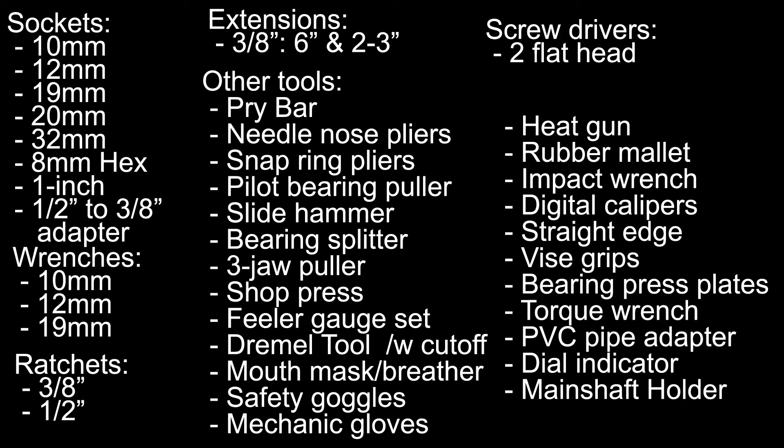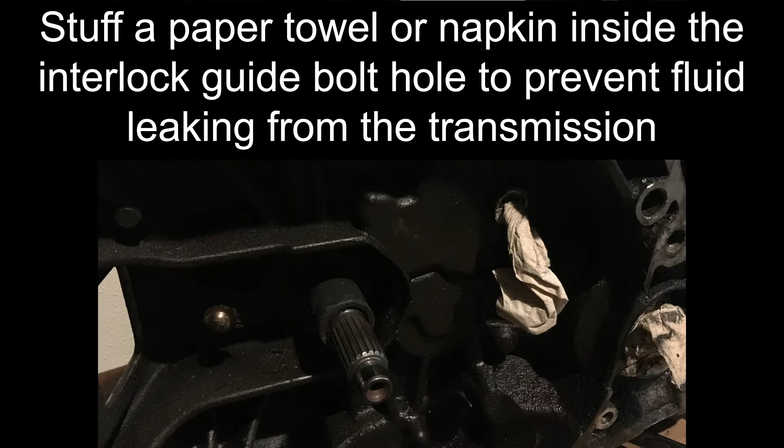To prevent excessive leaking of internal residual transmission fluid, stuff a paper towel, or napkin, into the axle holes. Insert the 8mm hex socket into the interlock guide bolt and unscrew it. Stuff a paper towel inside the interlock guide bolt hole, to prevent residual fluid from leaking out of the transmission. Remove the countershaft snap ring bolt by using the square drive of a 3/8 inch ratchet.

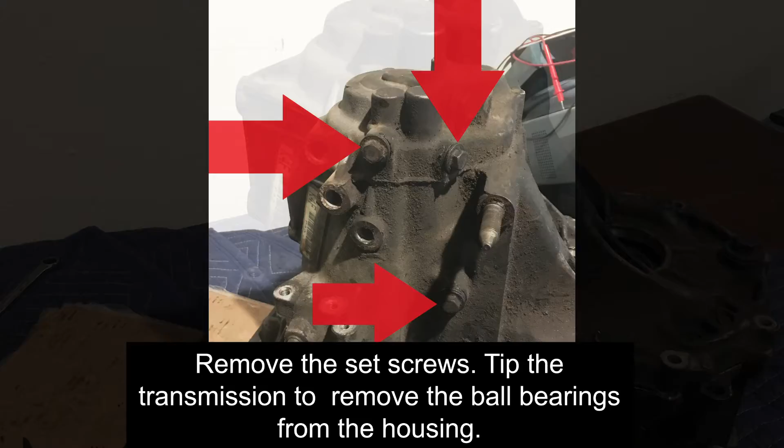Remove the set screws. Each set screw will have a ball bearing and a spring. Tip the transmission to remove the ball bearings inside each pathway. Remove the housing bolts in a cross pattern as shown in the image. Use a pry bar to pry on this point, just enough to crack the seal. Use a pry bar to pry on this point, just enough to crack the seal as well.

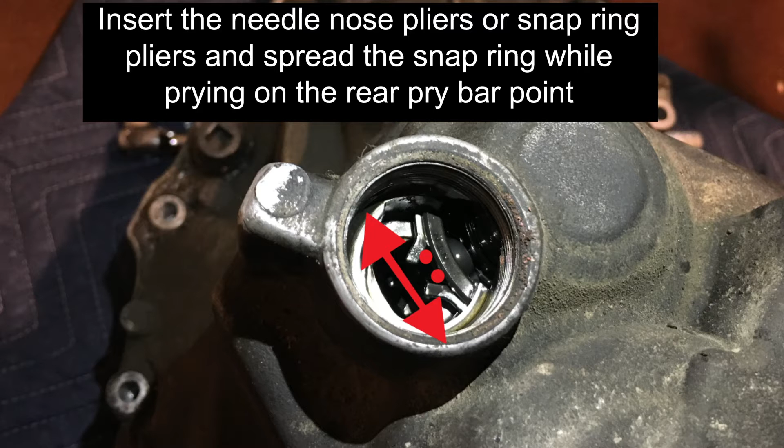Insert 2 smooth-ended flathead screwdrivers between the 2 halves, at these points on the transmission. Stop when you feel resistance. Insert the needle nose or snap ring pliers at the point of the 2 dots, and spread the snap ring while prying on the rear end pry bar point. Prying on the housing while spreading the snap ring will allow the housing to separate from the counter shaft bearing. Once the bearing is released from the snap ring, lift the housing from the transmission.

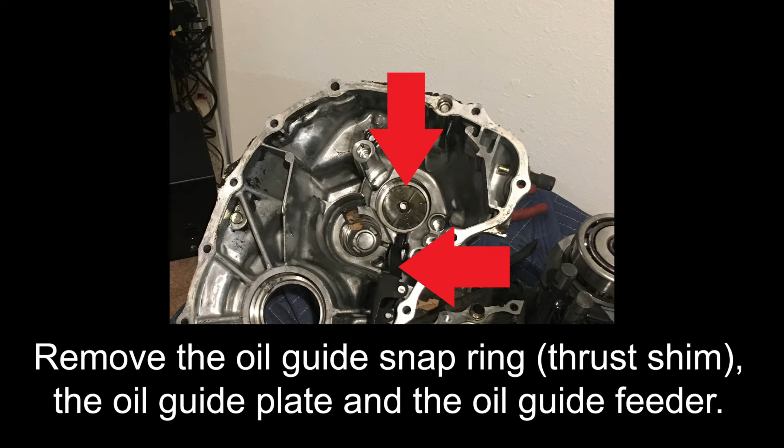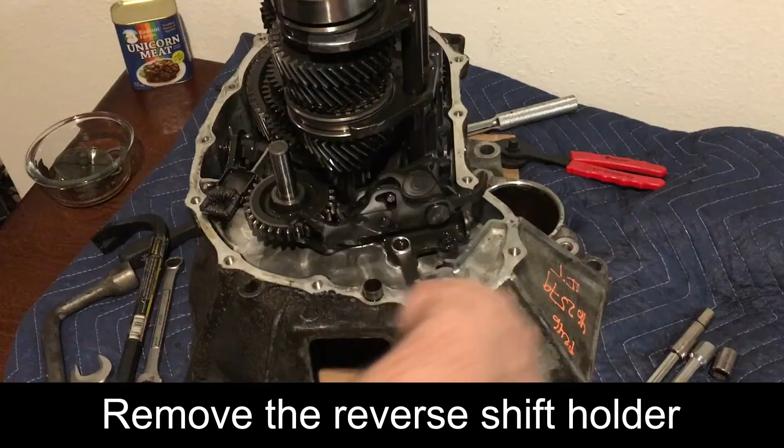If the top main shaft bearing stays inside the case, as shown what happened here, the top of the transmission housing can be heated and tapped with a rubber mallet to release the bearing. Remove the oil guide snap ring, or thrust shim, the oil guide plate and the oil guide feeder. Remove the reverse shift holder by removing the 2 bolts with a 10mm wrench.

Remove the reverse gear and shaft. Note the orientation of the gear and shaft for reinstallation. Remove the shift arm B bolt. You may have to move the shift shaft to orient the bolt to the accessible angle shown here. Remove the spring washer.

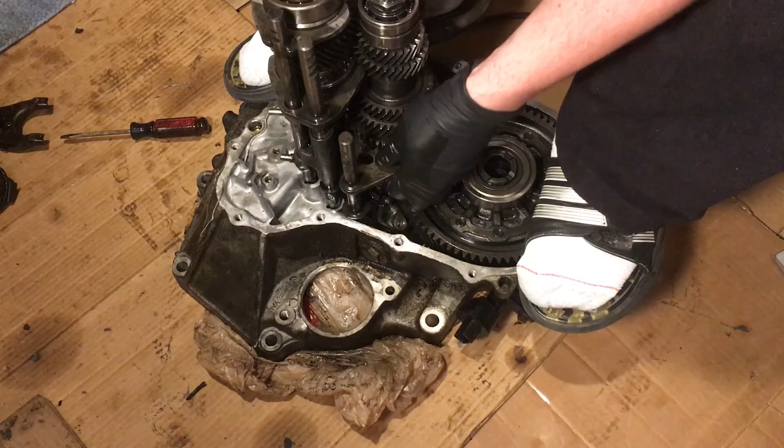Remove the gear and shaft sets. You may have to wiggle the gear sets while pulling to successfully remove them. Work the 2 shafts out. After working them partially out, grab the counter shaft at the bottom and work it up, while turning it slightly, side to side. When the shaft lifts up, the shift forks may fall out, as shown in this video.

If you want to look cool while doing this, wear socks with sandals, as demonstrated here.

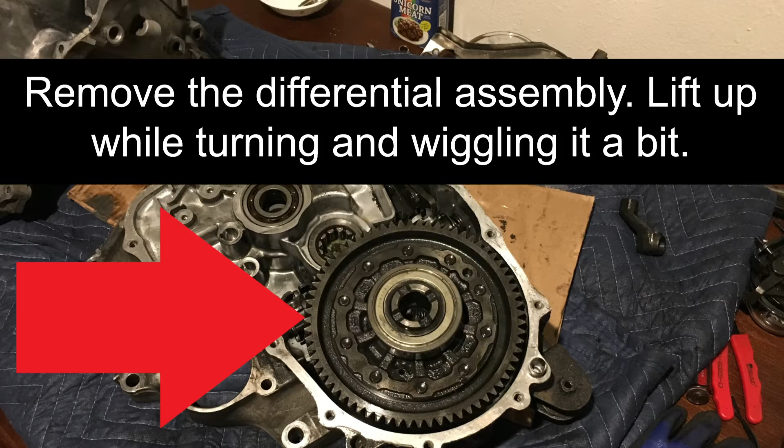Remember, there is a flat washer and a spring washer on the main shaft. The spring washer bulge faces and rides against the input shaft bearing, and the flat washer sits on top of that. Next, remove the differential assembly. While pulling straight up, lightly work it side to side.

Now we will remove the axle oil seal on the bell housing. Take a flat screwdriver along the inner metal ring of the seal and strike it with an impact device. Do the same for the other oil seal. Note the differential thrust shim inside of the bell housing.

Now it is time to remove the shift shaft and attachments. First, remove the set ball spring bolt. Note that this bolt has a spring and a ball bearing that will be retrieved shortly. Next, remove the shift arm bolt and spring washer.

Tip the transmission to retrieve the set spring bolt ball bearing. Slide the shift shaft rod out of its channel. Remove the shift arm from the housing.

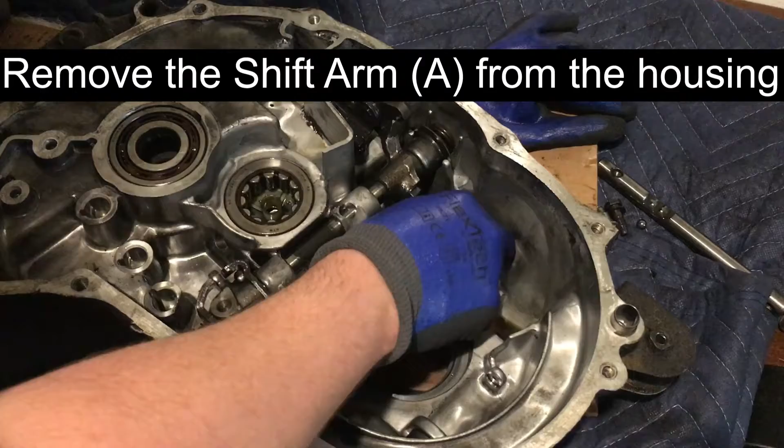Next, we will remove the shift arm bolt and the shift arm shaft plug. For those without an impact gun, a close-ended wrench and a hammer will do the trick. This makes removing the bolt easier because the shift arm will want to move while loosening the bolt. Remember to keep the spring washer with the bolt as it is removed.

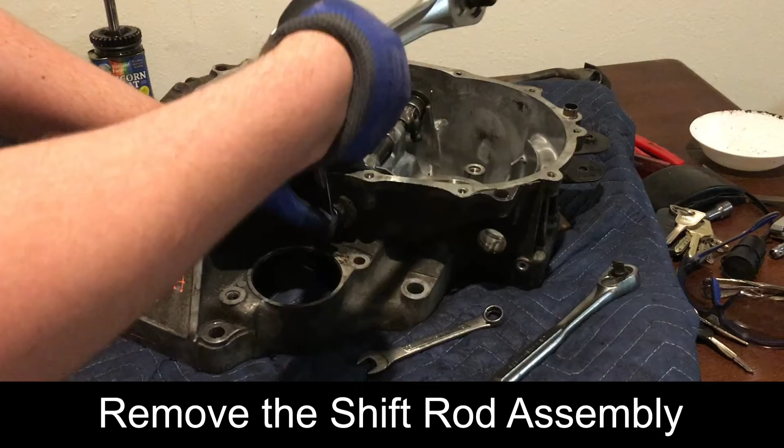Next, we will remove the shift rod assembly. This bolt can be very tight. An impact gun is the easiest way, but the method for removing the last bolt can also be applied here. Once the bolt is removed, the first gear tension spring will come out as well.

Next, we will remove the shift arm rod. Note, there is a ball bearing under spring tension under this shift rod. Cover this area while the rod is being removed. Take note that there is a collar inside of the channel that housed the spring and ball bearing. Do not lose this during cleaning of the housing.

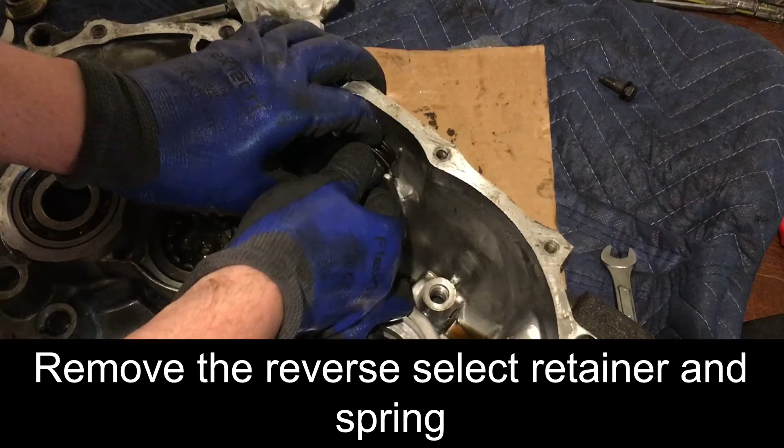Remove the shift arm piece, and then remove the interlock and shift arm piece. Next, we will remove the reverse select retainer and spring from the transmission case. Next, remove the two 10mm bolts from the reverse lock cam, then remove the lock cam assembly.

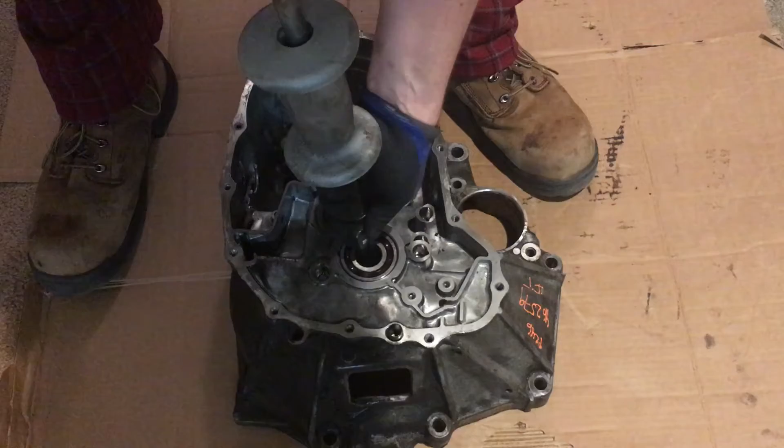Next, we will remove the case bearings. First, remove the input shaft bearing with a pilot bearing remover and a slide hammer. Insert the tool and turn it to expand the removal arms snugly against the bearing. Once the arms are snug against the inside of the bearing, use the slide hammer to pull up. Remember to hold the transmission case down while you do this.

Now we will remove the counter shaft bearing. As with the last bearing, insert the pilot bearing remover, turn it to expand the arm snugly against the bearing, and pull up on the slide hammer. Remember to secure the transmission case as you pull up. Remove the countershaft oil guide plate.

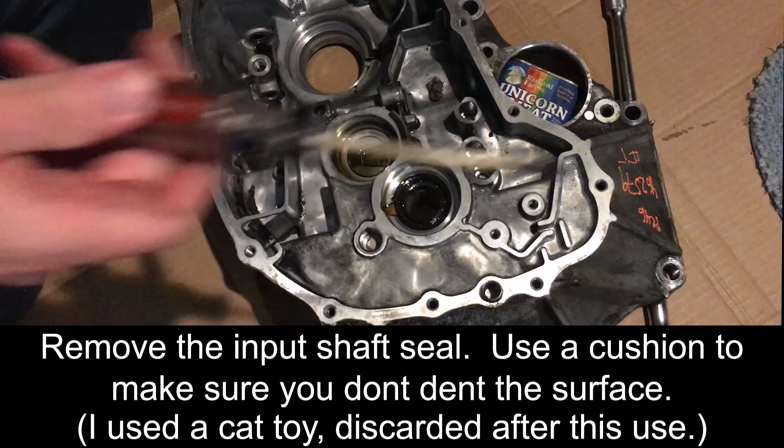Next, we will remove the input shaft seal. Use a cushion to make sure you do not dent the surface with your pry tool. Make sure not to scrape the side of the transmission seal surface with the pry tool.

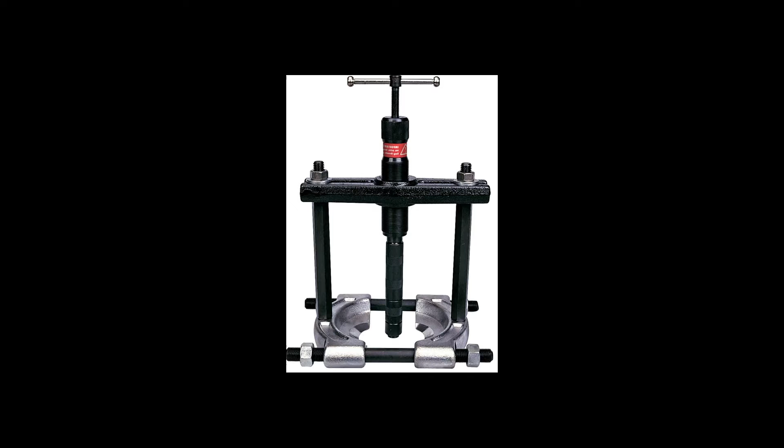Remove the main shaft bearing. The Honda manual calls for a bearing puller, but many times, you can take this bearing off by hand. If you cannot get this off by hand, one of these methods can be used: a bearing splitter with a press, a bearing splitter kit, or a 3-jaw standalone puller.

Next, we will press off the 4th and 5th gear assemblies. Depending on your press setup, you may need to have supports against the 4th gear to press against, as shown here. Make sure to catch the shaft since it will fall as the gears are released.

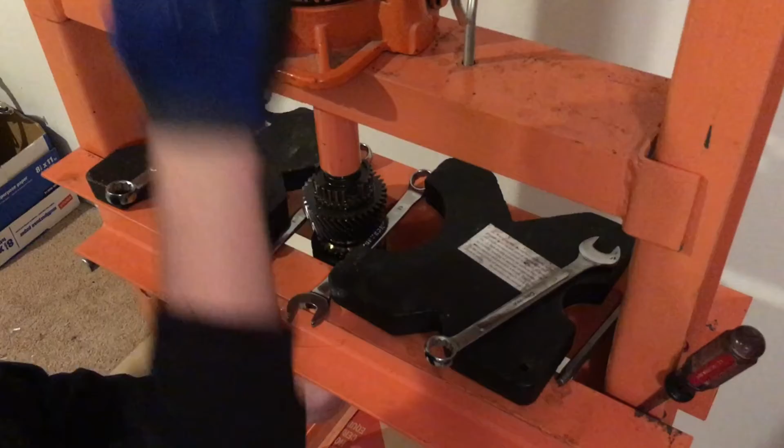Next, press off the 3rd gear assembly. Use the press plates to support the 3rd gear while pressing off the shaft. Again, make sure to catch the shaft as it will fall when the supported gear is released.

An alternative way to take apart the main shaft is to use a rubber mallet and a small socket. First, put the small socket inside the bearing race, against the main shaft, then tap against it. This will release the bearing. Next, hold the 5th gear hub and tap the main shaft to release it. Set the hub aside, then take off the 5th gear synchro and synchro ring.

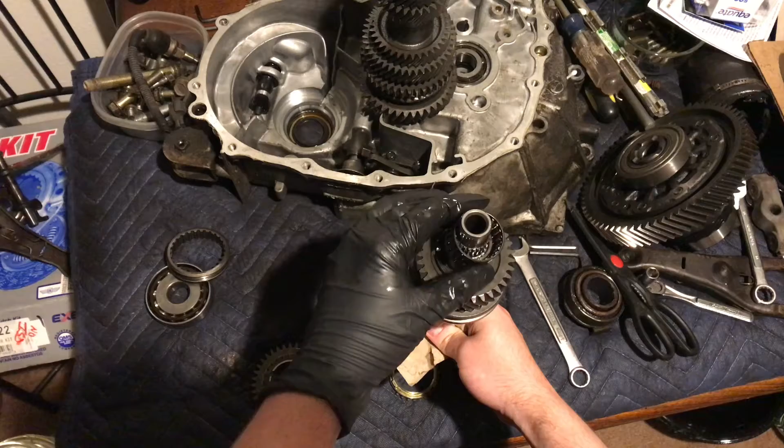Remove the 5th gear and the 5th gear needle bearing, along with the spacer collar that the needle bearings ride against. Remove the 4th gear and the 4th gear needle bearing. Remove the 4th gear synchro and synchro ring. Remove the 3rd and 4th gear synchro slider.

Remove the 3rd and 4th gear synchro hub by holding below the hub and tap the main shaft to release the hub. Remove the 3rd gear needle bearing. This image shows the list of parts that were pressed off of the main shaft.

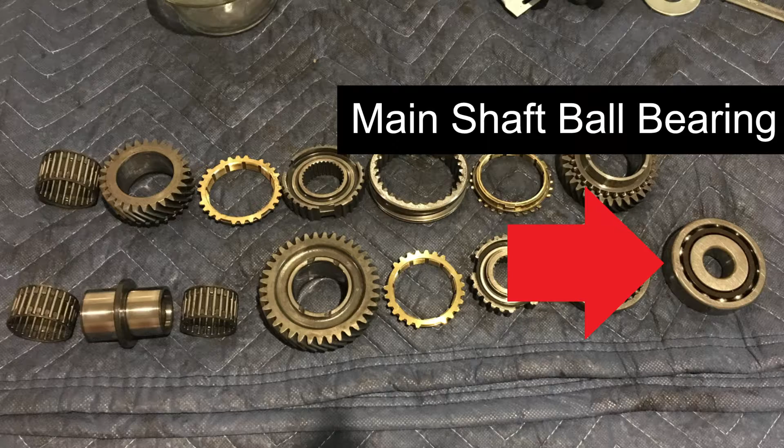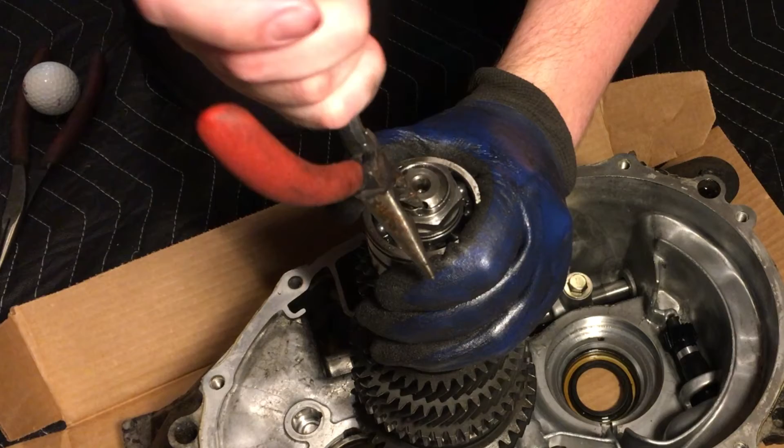Next, we will disassemble the counter shaft. We will start by removing the 32mm nut. Before removing the nut, we will need to remove the indentation made on the nut lip. We used a needle nose pliers to take out as much of the indentation as possible. Be careful not to pull too hard, as this may break the tip of the pliers.

Next, we will be using an electric impact gun with a 32mm impact rated socket. The nut should come off very quickly. Remove the washer on top of the bearing. Next we will press off the counter shaft gears. Use a bearing separator to support the top 2 gears as shown here.

Make sure the press is square with the counter shaft, then press off the shaft to the point of the top bearing. Release the press and remove the top bearing. Make sure that the shaft is still square with the press, then continue to press off the shaft. Make sure to always be ready to catch the shaft since it will fall when the gears and bearing are released.

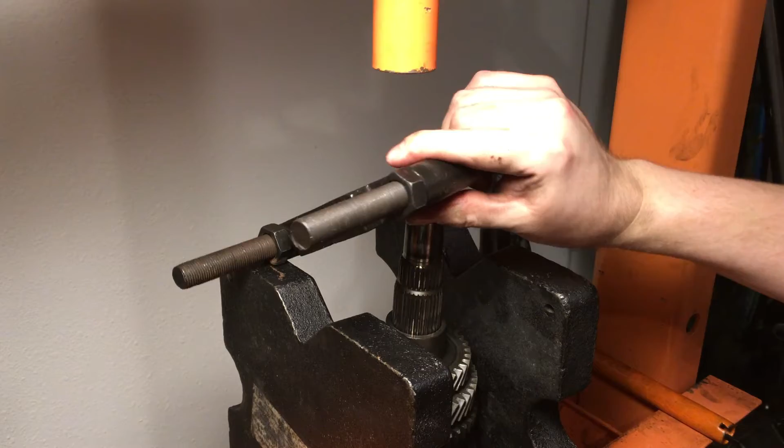An alternative way to remove the top bearings will be shown here. Use the bearing separator tool to support the first bearing on the counter shaft. If your press bottom support is not wide enough to fit the whole shaft, the press plates can be used to raise the shaft assembly, as shown here.

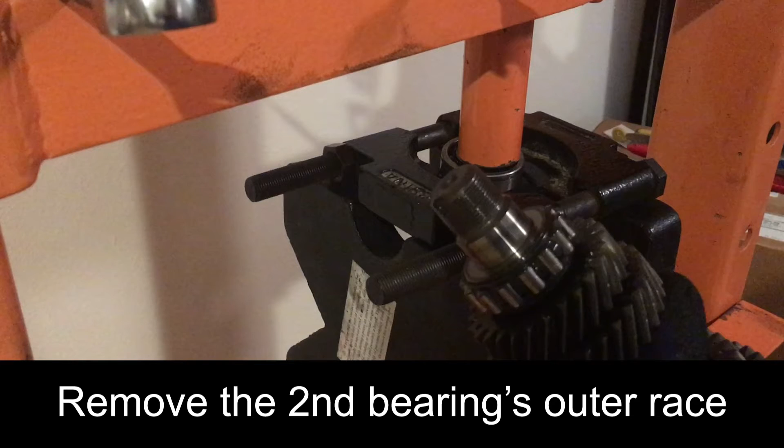Next, use the bearing separator tool to support the second bearing on the counter shaft. As with the main shaft, make sure to catch the counter shaft since it will fall when the supported bearing is released.

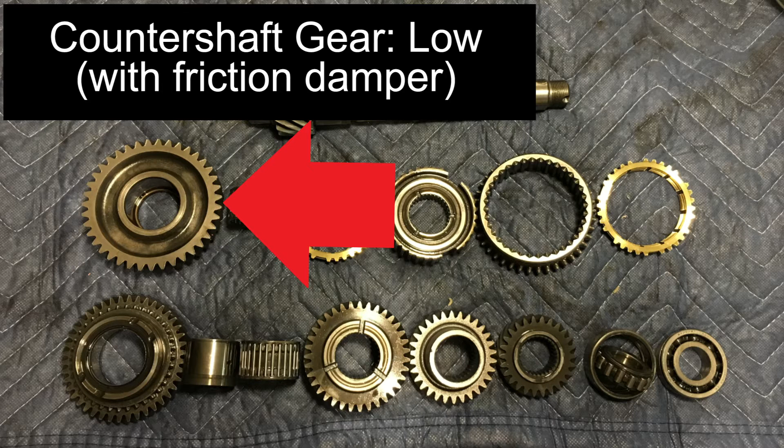We will now remove the rest of the shaft. It will not take much to release the gear sets from the shaft. Support the first gear with press plates. Hold the shaft so it will not fall when it is released. Pictured here are the counter shaft components that were pressed off of the shaft.

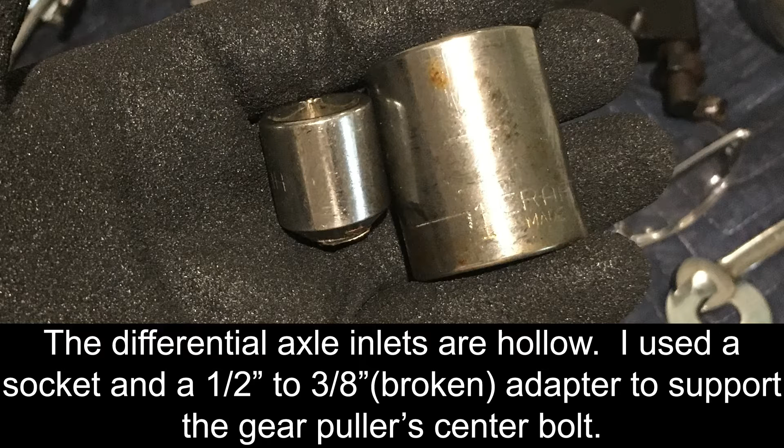Next, we will remove the differential bearings from the differential. First, we will remove the bearing from the non-speed gear side with a 3-jaw puller. The center of the differential shafts are hollow, so the puller will need support. We used a 1-inch socket with a 1/2 inch to 3/8 inch adapter inside of the socket.

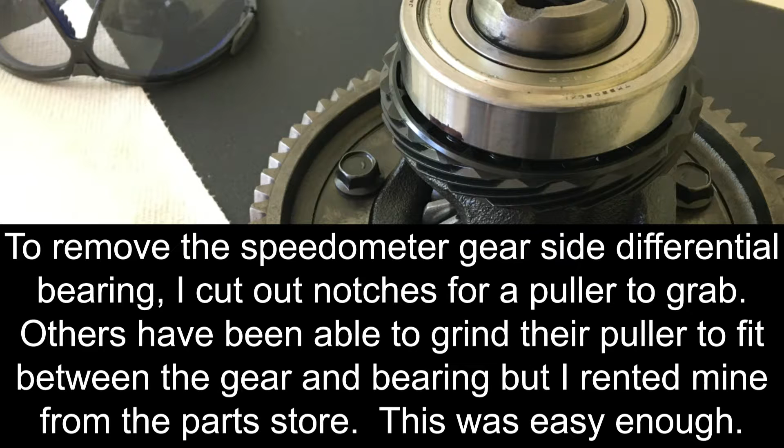Removing the speed gear side of the differential is a bit more tricky. The speed gear blocks most 3-jaw pullers, so a bit of grinding is needed. Some have ground down the jaws on their puller to fit between the bearing and speed gear. Our 3-jaw puller was rented from an auto parts store, so this was not an option. We marked the bearing where our puller would grab onto the gear.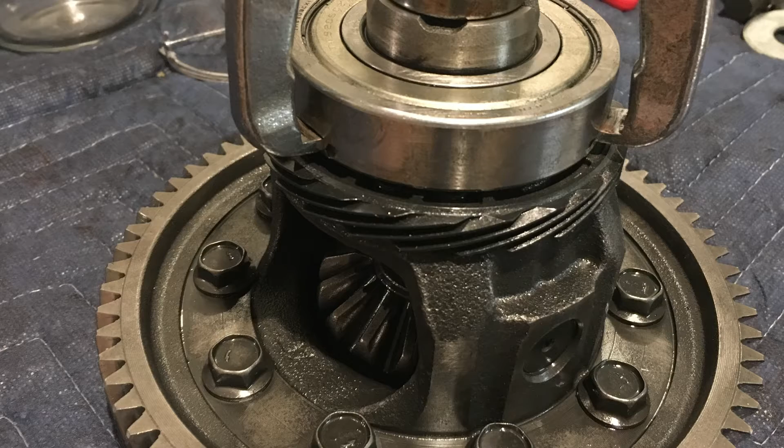We then used a Dremel tool with a cut-off wheel to grind away part of the bearing, so the puller could grab onto the bearing. We measured about 1/4 inch to be ground away at each spot. Be sure to not cut into the plastic speed gear. As with the first differential bearing, we will use the 1-inch socket, adapter, and 3-jaw puller to remove the bearing.

Next, we will inspect the synchro to gear hub clearances. Honda lists the standard clearances to be 0.73 to 1.18 mm. The service limit is 0.4 mm. If the clearance is below the service limit, you should replace the synchro ring and the synchro cone.

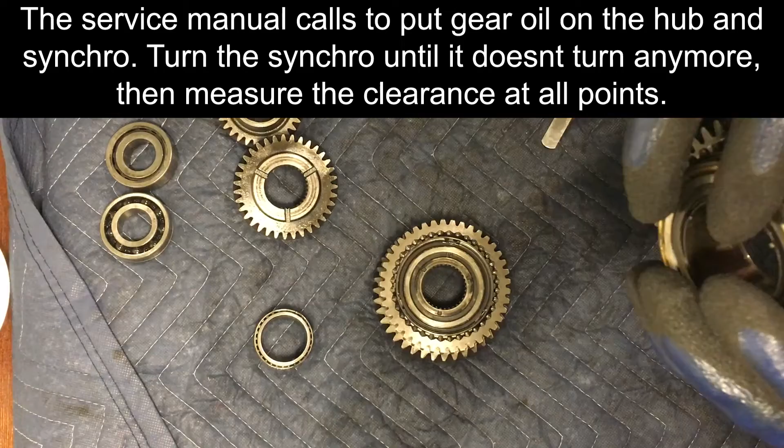The service manual calls to put gear oil on the hub and synchro. Turn the synchro until it grabs the hub and it does not turn anymore. Then measure the clearance with a feeler gauge set at all points. Do this for all gear sets.

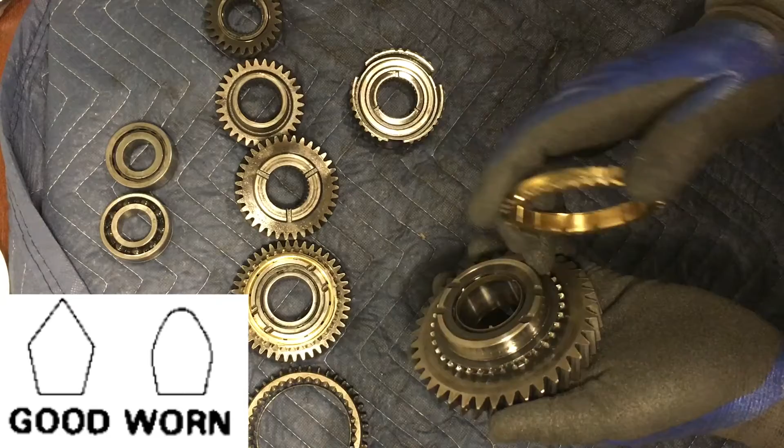Inspect the sliders. Make sure that the teeth are sharp and not rounded off. If the teeth are worn and are not sharp, the slider for that gear should be replaced. After measuring the synchro clearances and the slider teeth, be sure to put the parts back in order so reassembly is easier. Do this for both the counter shaft and the main shaft.

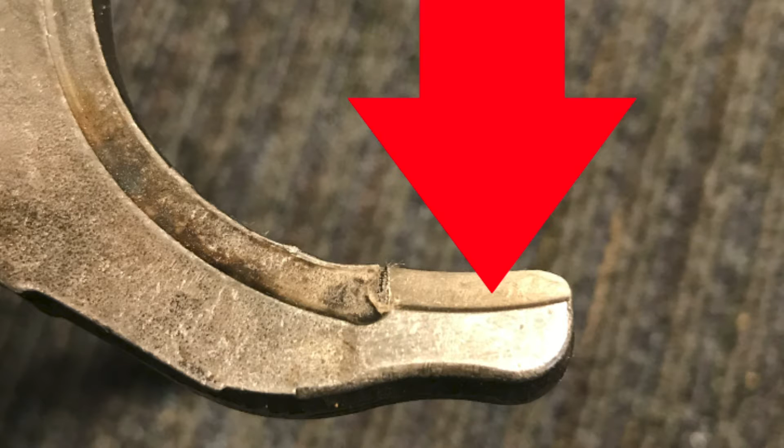Now, we will remove the shift shaft oil seal. Now we will measure the shift fork clearances. The common problem on this transmission is that the third gear shift fork is worn, causing shifting problems. Measure the fork thickness within the wear pattern. The factory manual's limit for thickness is to have at least 7.4 mm. If the thickness is less than 7.4, replace the shift fork.

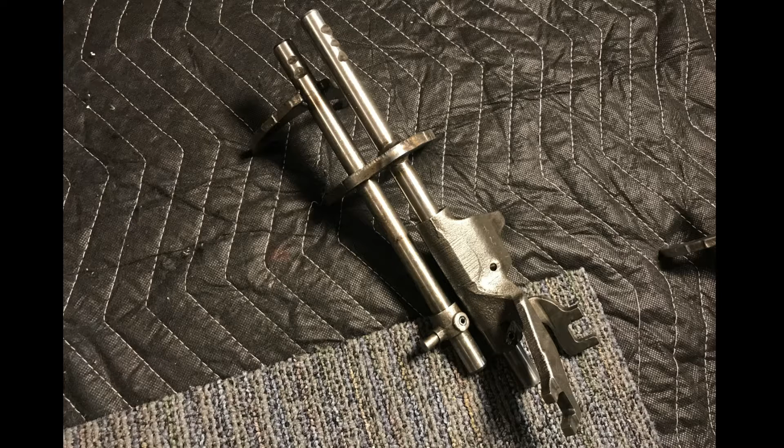First, we will remove the 5th gear shift fork. This needs to be separated from the 3rd gear shift fork. We need to have a base that will support the shift fork while the pin is being pressed out. A brake rotor is shown here. A punch is needed to drive out the pin.

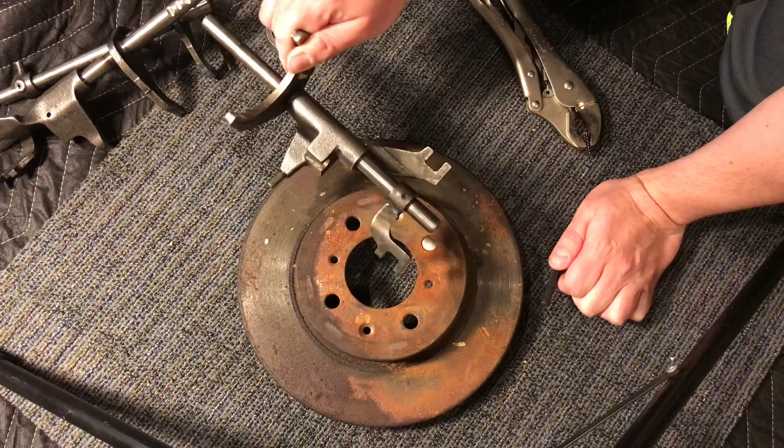Next we will remove the pins from the third gear shift fork, so that we can remove the hardware. We will use the brake rotor to support the shift fork while the pins are pressed out. Next, we will install the hardware onto the new third gear shift fork. If you have an out-of-limit measurement on a different fork, you may not need to go this far.

Now we will install the hardware onto the third gear shift fork. It is recommended to use a new shift shaft pin. Use a punch to make sure the pin is flush on both sides.

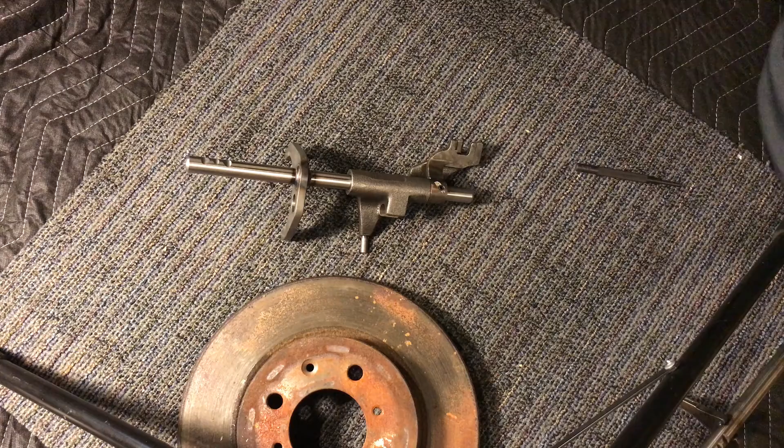Before the fifth gear shift fork is installed, make sure to rotate the hardware on the third shift fork, as shown here. After the fifth gear shift fork is installed, the third gear shift fork hardware cannot be rotated into the proper place. The fifth gear shift fork and its hardware will now be installed. A new pin is recommended for the installation.

Now that everything from the transmission has been disassembled, clean the two halves thoroughly. One option is to use a pressure washer. Others include using degreasers. Make sure to clean off all degreasing solutions before reassembling the transmission.

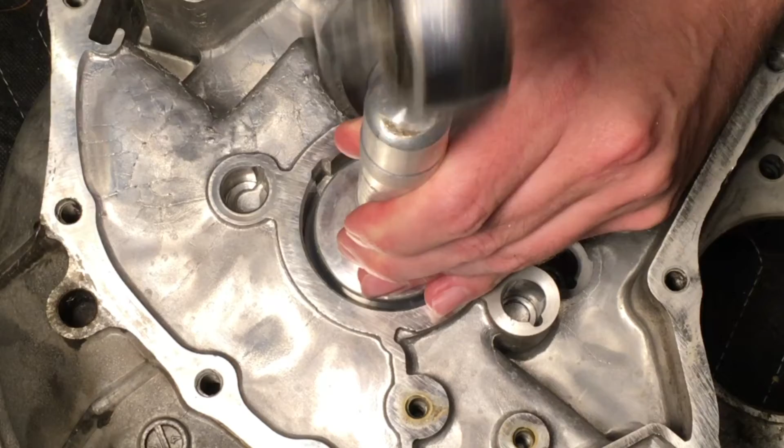Now, we will install the main shaft oil seal and the main shaft bearing. Make sure to place the oil seal with the solid face facing down. The side with the flexible lip and spring should be facing up. Use a seal driver plate that contacts the rigid outside diameter of the seal. Tap into place. Make sure that the seal reaches the bottom of its bore.

The evenness of the seal can be checked with a depth caliper set. Check multiple points around the circumference of the seal against the machine surface. Next, we will install the main shaft bearing. Make sure to install the bearing with the letters facing upwards, for easy identification if it ever needs to be replaced in the future. Use a bearing press plate to tap the bearing into place.

Make sure to use a bearing press plate that contacts and applies pressure only to the outside of the bearing. It is also important to make sure the bearing goes in straight. If the bearing is difficult to get all the way into the bore, a shop press can be used to finish the job. Stop when you feel resistance. Spin the inner race to make sure it turns freely.

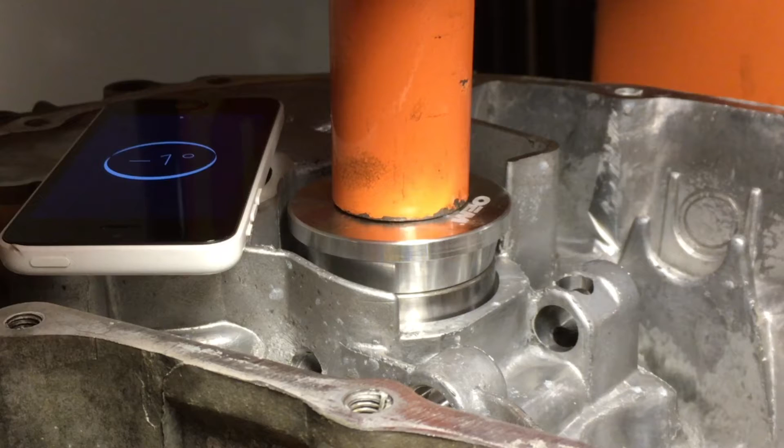Next we will install the counter shaft oil guide plate and the counter shaft bearing. Install the guide plate with the spout facing up. Set the bearing with the identification letters facing up. Use a bearing press plate that will press on the outside race of the bearing. Make sure to tap the bearing in straight. As with the last bearing, if it will not tap in all the way, a shop press can be used to press the bearing in the rest of the way.

One extra step that can be taken is to stake the counter shaft bearing with a center punch. These are known to walk themselves out of their bore, causing second gear shifting problems, so staking the bearing can help keep it in its place. Use a punch to stake the bearing in several places. This process is not in the Honda service manual, but it is what many community builders do to their transmissions.

Next, we will install the reverse lock cam. First, insert the lock cam into the housing, then install the bolts. Using a torque wrench, tighten these 10 mm bolts to 11 foot-pounds. Next, we will install the reverse select spring and the reverse select retainer. Compress the spring into the retainer, then press it into the transmission housing.

Now we will install the collar and spring for the secondary shift shaft. Place the spring inside the collar. Then, drop the assembly inside of the transmission housing. Slide the shift shaft into the transmission housing. Make sure to point the large notch down toward the spring and collar we installed earlier.

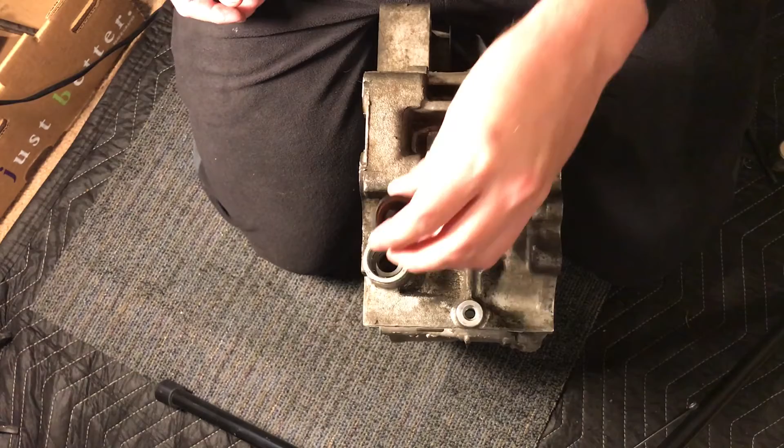Next, install the shift piece. This piece slides over the shift shaft. When you push the shift shaft all the way into the transmission, you will feel a prominent click. Install the shift shaft oil seal. Use a 20mm socket to tap the oil seal in. Lubricate the inside of the shift shaft seal with transmission fluid.

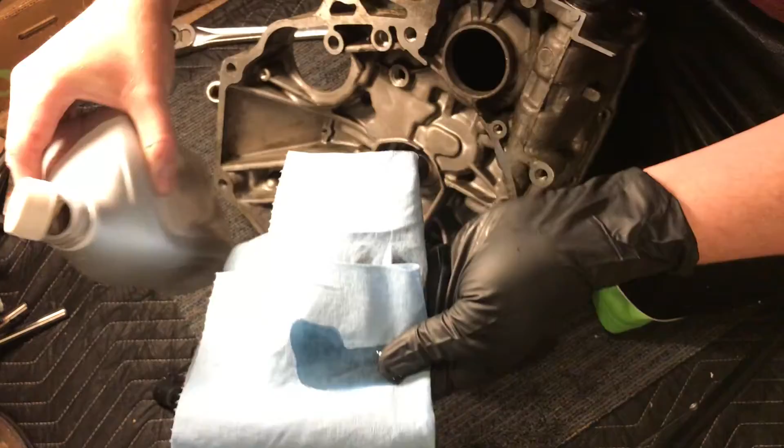Clean the shift shaft. Slide the shift shaft into the seal. Make sure that the 3 notches face up. Now we will install the shift shaft piece. This links the 2 shift shafts together.

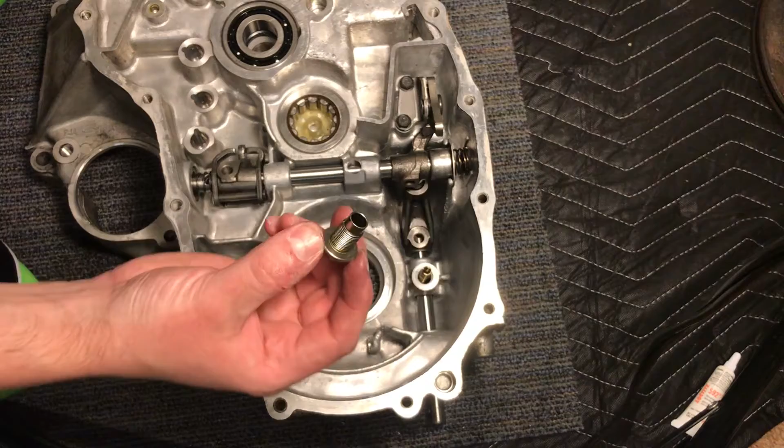Install the set ball spring bolt, the spring, and the ball bearing. First install the ball bearing. Then install the spring. Finally, install the bolt. Install the bolts for the shift shaft link. Make sure that the convex side of the spring washer faces the head of the bolt.

Torque the 2 black shift piece bolts to 23 foot-pounds, or 31 Newton-meters. Torque the spring bolt to 16 foot-pounds, or 22 Newton-meters. Before assembling the shafts, clean the oil ports, and inside the shafts. Many times, they are blocked by fluid sediment.

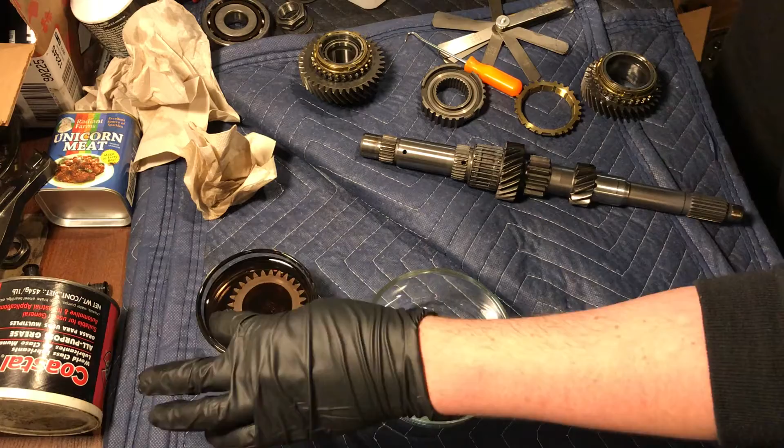Now we will move on to build the main shaft. First, the 3rd gear needle bearing will be installed. Be sure to clean all parts and cover in transmission fluid before assembly. For larger parts, such as this gear cone, have a small bath of transmission fluid to set the part inside. Have a second container for the excess fluid to drain inside. The 3rd gear will be installed over the needle bearing.

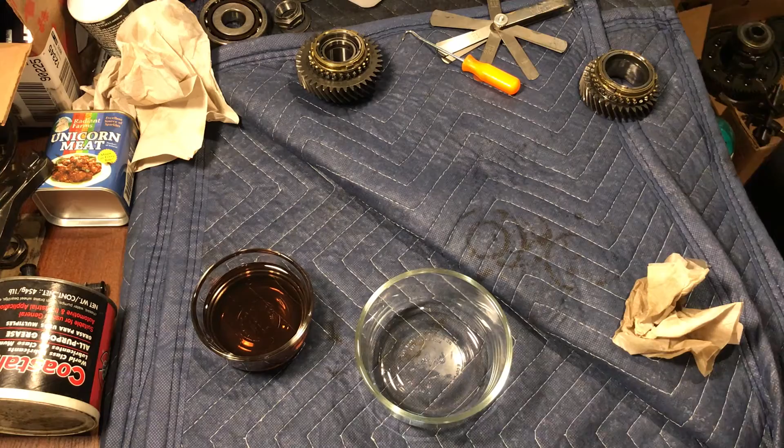The 3rd gear synchro spring will need to be clipped onto the synchro, then slid onto the gear cone. Install the hub onto the main shaft. Make sure to position this so that the U-shape faces up. The slider key will slide into this slot when it is installed in the next step. Make sure that the synchro fits properly into the hub's notch. You may have to use a stable surface to press against to get the hub all the way onto the main shaft.

Install the gear slider. Make sure that the notch in the slider is facing up when it is installed. This will slide into the hub's notch. Certain teeth on the slider are keyed so that the slider will be installed in the correct position. Slide it down onto the 3rd gear so that it clicks. Next, install the synchro and spring set. Then install the gear cone.

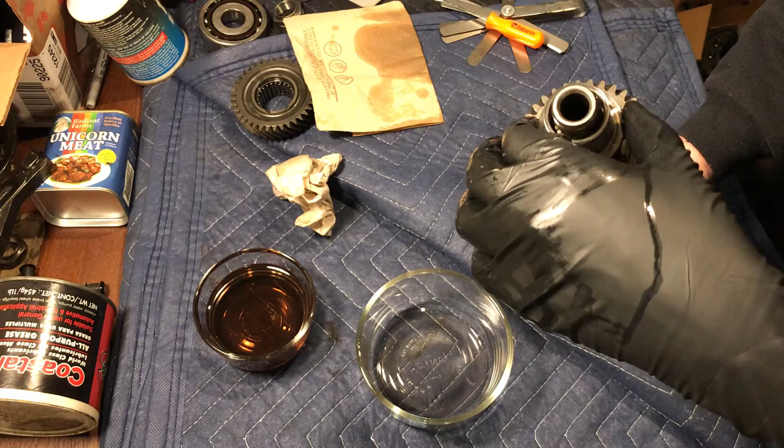Install the needle bearing, then the spacer collar. Install the 5th gear needle bearing onto the spacer collar. Install the 5th gear over the needle bearing. Make sure that it spins freely. Next, install the 5th gear synchro and spring assembly.

Install the 5th gear hub. Make sure to install the hub with the 3 notches facing up. You will need to use a tool to tap the hub onto the main shaft, as it is a snug fit. Make sure that the synchro notch is within the hub's notch area. Install the 5th gear slider onto the hub. Make sure that the angle teeth of the slider point toward the synchro when installing.

As with the other parts, cover the top bearing in transmission fluid, then let it drain. Install the top bearing. Make sure to install the bearing with the stamped letters facing up. You will need to tap the bearing the rest of the way onto the main shaft.

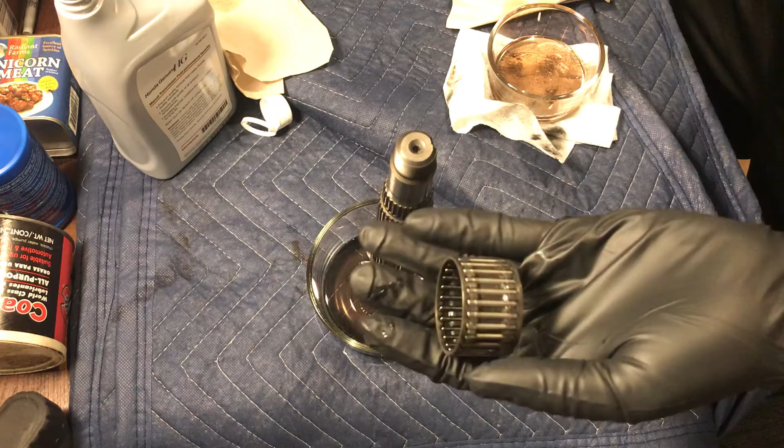Install the first needle bearing onto the countershaft. Install the friction dampener into the first gear. Make sure to dip this in transmission fluid to make installation easier. Slide the gear over the needle bearing. Slide the synchro and spring assembly onto the first gear cone.

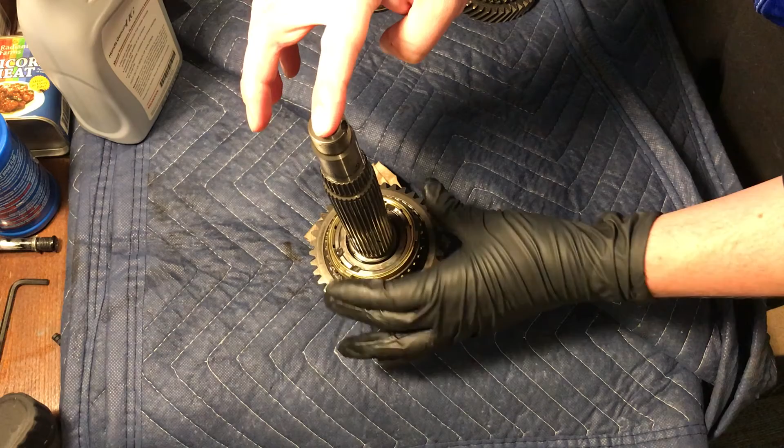Install the gear hub. Make sure that the side of the hub that says up is installed facing up. Another important thing in this step to follow is to align the teeth from the friction dampener and the holes on the bottom side of the hub. These must line up so that the dampener can grab onto the hub. Be sure to also align the notch in the hub with the corresponding spot on the synchro.

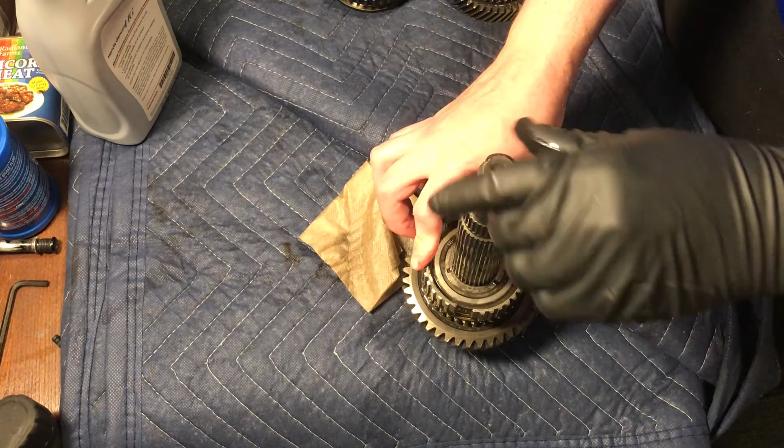To test that the hub and the friction dampener are installed correctly, rotate the first gear. It should turn freely with a bit of drag. Install the slider. Make sure that the teeth on the outside of the gear are facing up.

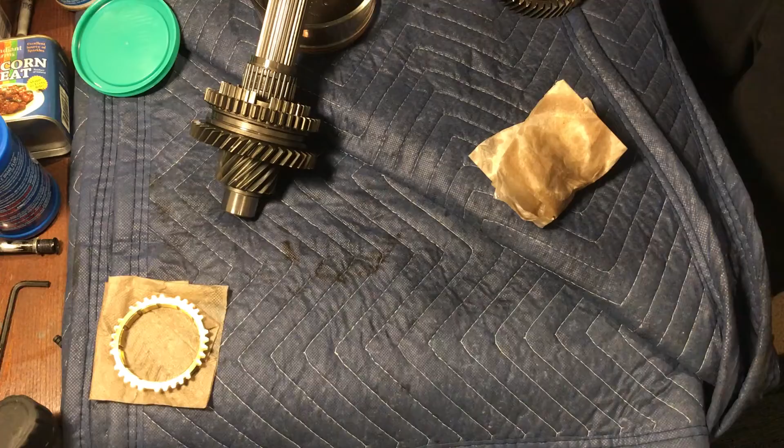Install the friction dampener onto the second gear. Make sure this has been coated in transmission fluid. Install the synchro and spring assembly onto the gear. Install the gear and synchro assembly onto the countershaft. Make sure to align the teeth on the friction dampener to the notches on the hub, and that the notch on the hub aligns with the corresponding spot on the synchro.

Turn the gear to check for drag, indicating that the friction dampener has been aligned correctly. Install the collar, then install the needle bearing. Again, turn the gear to make sure there is drag, indicating that the friction dampener is correctly aligned. Install the fixed third gear with the gear teeth on the bottom side.

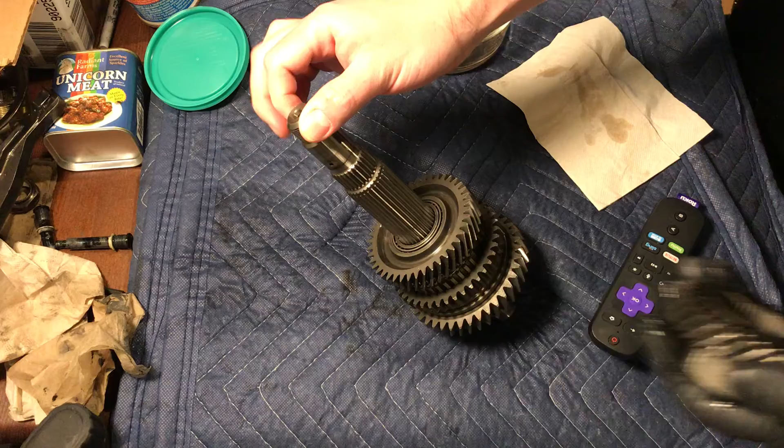Install the fixed fourth gear with the gear teeth on the top side. Tap into place with an adapter if needed. Install the fixed fifth gear with the 3 notches facing up. Tap into place with an adapter if needed.

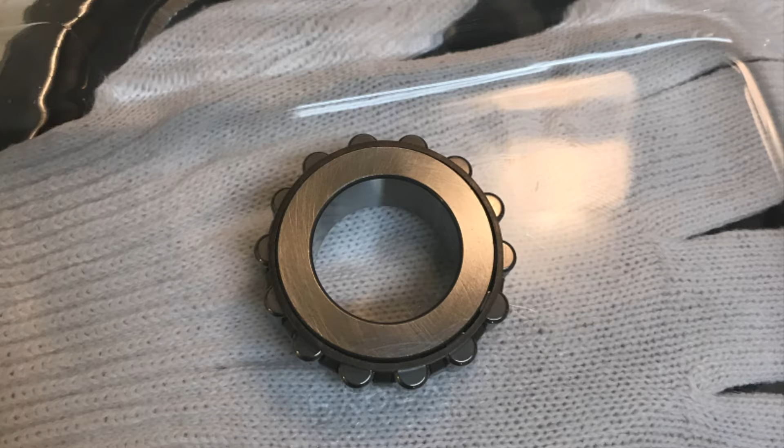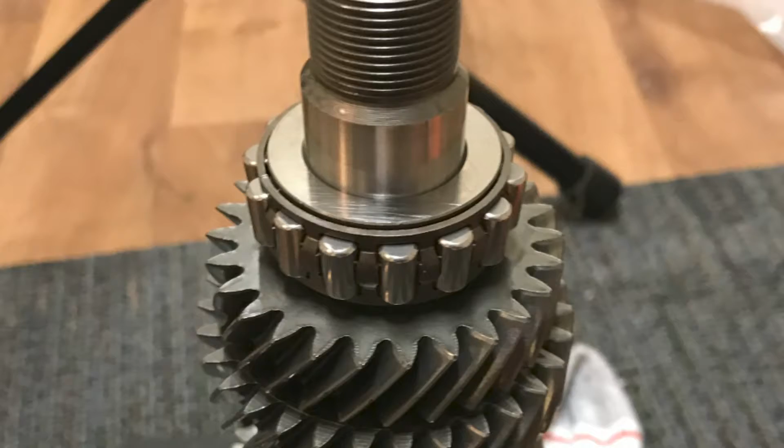We will now install the countershaft bearings. First, install the roller bearing that comes with the cage. Heat it up slowly, not exceeding 210 degrees, with a heat gun. Other heating methods are available. Tap the bearing into place by only contacting its inner race. Coat the bearing's cage in transmission fluid, then install onto the bearing.

Install the ball bearing with the notch, which is what the transmission housing clip fits into. Heat the bearing slowly with a heat gun, not to exceed 210 degrees. Make sure the notch on the bearing is at the top. Tap with an adapter, contacting only the inner race. Coat the ball bearings in transmission fluid.

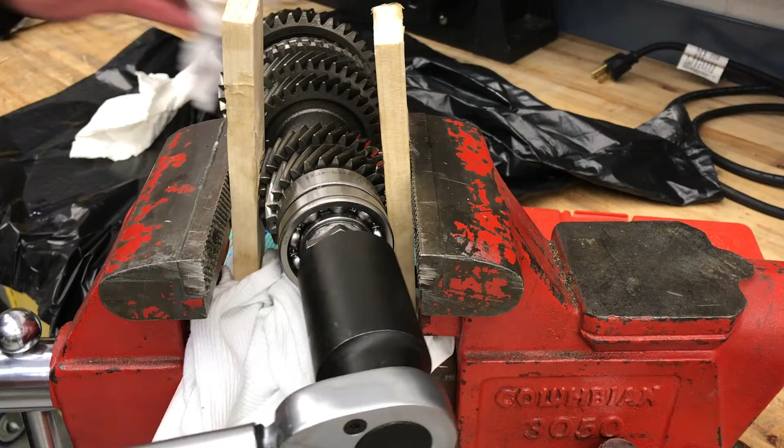Install the spring washer. Make sure that the convex side is pointing up. Then install the countershaft nut. Torque the top nut down to 80 foot-pounds. Loosen the nut to 0. Then tighten the nut again to 80 foot-pounds. Use a punch to stake the top nut.

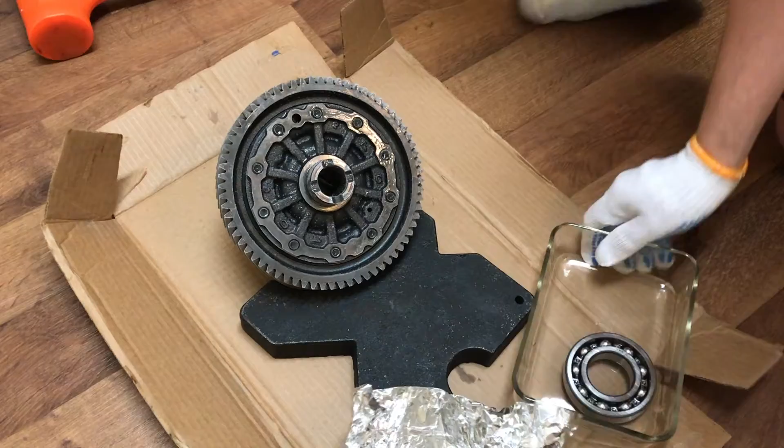Now we will install the bearings on the differential. As with the countershaft bearings, heat these bearings up slowly, not to exceed 210 degrees. If you tap onto the bearing, only contact the inner race. Use an adapter to contact the inner race, if needed. Make sure that the speedometer gear is installed on this side of the differential before installing the bearing.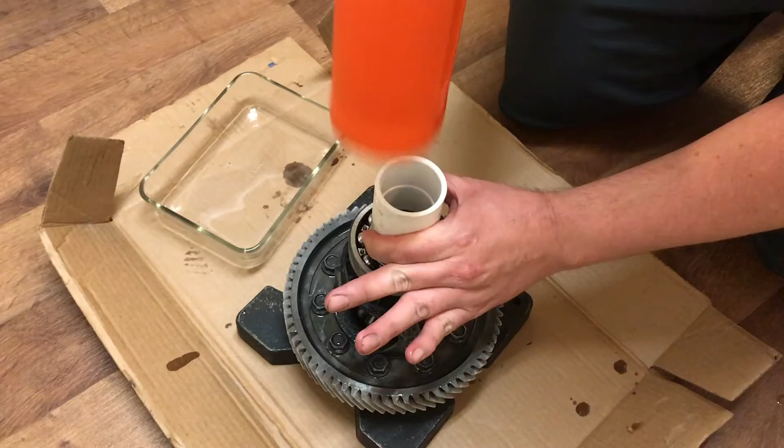Install the transmission magnet into the housing. The magnet part will be on top. We will now measure the clearance to determine the correct main shaft thrust shim. If none of the gears were changed on the main shaft, this may not need to be done. To start, remove the thrust shim from the housing.

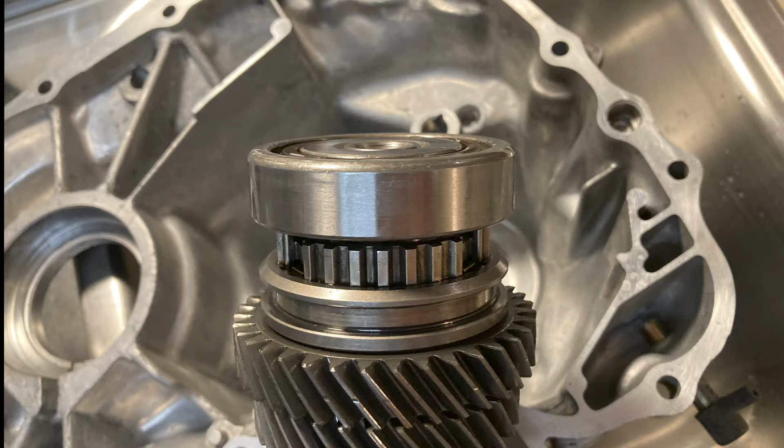Install the top bearing on the main shaft. Insert the main shaft into the housing, and tap with a mallet to ensure it is seated. Put the thrust washer on the end of the main shaft. Lay a straight edge across multiple points on the transmission housing. Use a depth gauge on top of the straight edge and measure down to the thrust washer.

Take that number, take away the thickness of the straight edge at the point that you used to measure, and that will give you the clearance between the thrust washer and the edge of the transmission housing. Take an average of the multiple points that you checked. Use a depth gauge over the input shaft bearing inner race. Do this at multiple points, and take an average of the numbers.

To calculate the correct shim thickness, take the averaged clearance between the thrust washer and the edge of the transmission housing, which is letter B in the formula, add the averaged clearance between the input shaft bearing and the clutch housing, which is letter C in the formula, take away 0.95 mm for the thickness of the spring washer. An example is given on the screen, taken from the Honda service manual.

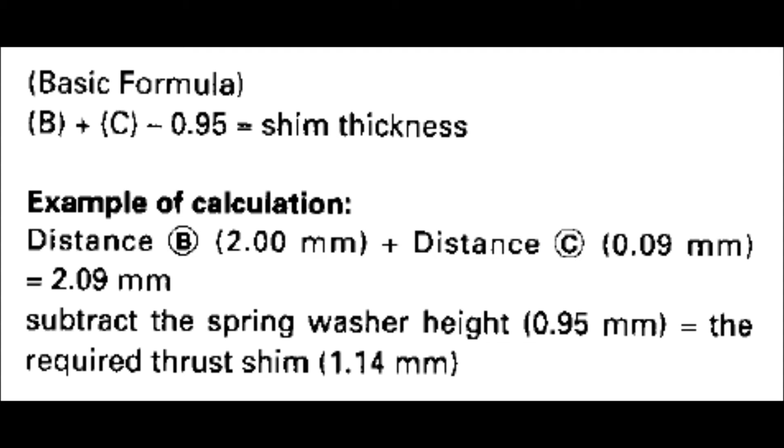Install the oil guide into the transmission housing. Install the oil guide plate over the oil guide. Install the main shaft thrust shim into the housing over the oil guide plate. Also, install a new countershaft bearing snap ring into the housing. Now we will install the main shaft and countershaft into the transmission. First, cover the splines of the main shaft with tape to protect the input shaft bearing seal.

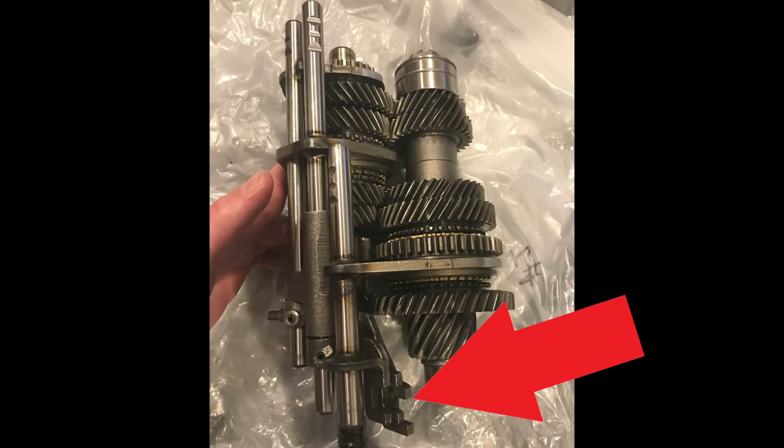Install the shift forks onto the main shaft and countershaft. Make sure that the shift guide pieces line up side by side. Before installing the shaft assembly, lift the transmission casing so the main shaft has room while being installed. Install the differential into its place in the casing. Place the input shaft bearing spring washer onto the input shaft bearing. Make sure the convex side is facing toward the bearing. Then, install the main shaft washer on top of the spring washer.

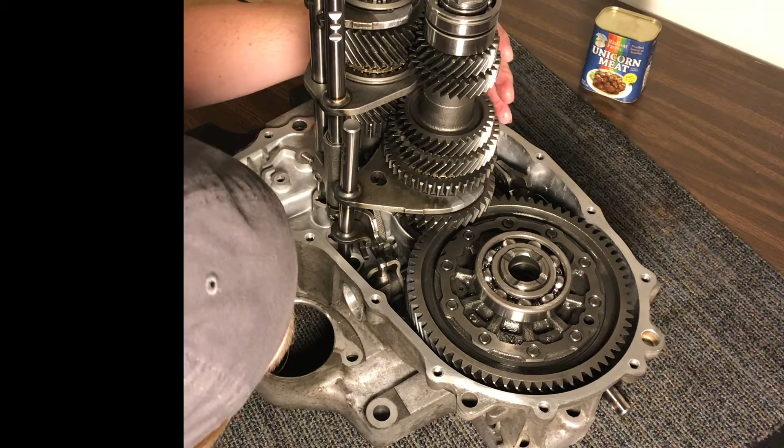Now we will install the shaft and fork assembly. Make sure that the countershaft fits squarely into the countershaft bearing, and that the shift shafts fit into their corresponding holes. Make sure that the interlock is able to fit into the shift fork. You may have to move a shift shaft to make sure it fits. If not done already, install the main shaft top bearing.

Install the interlock bolt and spring washer so that it locks to the shift shaft. Make sure that the convex side of the spring faces toward the head of the bolt. Torque this bolt to 23 foot-pounds, or 31 Newton-meters. Install the plug bolt. Coat the bolt in sealant. Install the shift spring, then install the bolt. Torque the bolt down to 40 foot-pounds.

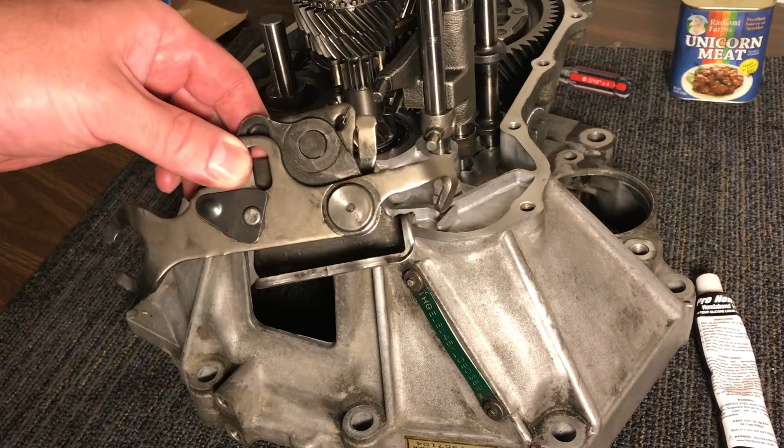Install the reverse gear shaft and gear. Make sure to orient the gear so that the teeth are on the top side. Install the reverse shift holder. Note that the points on the shift shafts fit into the shift holder. Install the reverse shift holder bolts. Torque these bolts to 11 foot-pounds.

Now we will add Honda Bond to the sealing edge of the transmission. Make sure that the surface of both sides of the sealing edge are perfectly clean before applying the sealant. Make sure the layer is very thin. The sealing edges are well machined, so not much sealant is needed. Install the transmission dowel pins.

Fit the transmission housing cover over the transmission base. The mating surface of this also needs to be perfectly clean. Make sure that the differential shim is installed in the housing. This clearance will need to be measured after installation.

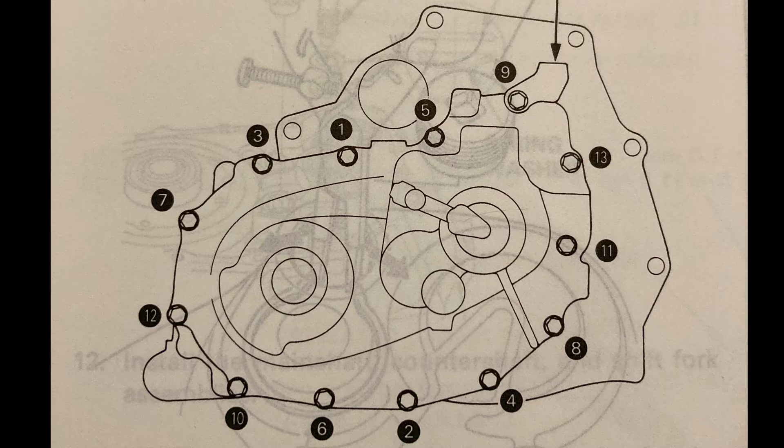Install the transmission case bolts. First, install the bolts finger tight, then torque down to 20 foot-pounds. When tightening the bolts, do so in a crisscross pattern, as shown here. Make sure to install the transmission mounting brackets, as shown here, before tightening the bolts.

Now we will install the interlock guide bolt. First, coat the bolt with sealant. We used Honda Bond HT. Before installing the bolt, make sure that the interlock is lined up with the hole. When positioned correctly, the interlock will make two parallel lines, equal space on each side. If this is not the case, line it up correctly by using the shifter.

If the bolt is installed without this being aligned, the interlock will be bent and will lock your transmission out of using certain gears. Install the guide bolt. If you feel any type of resistance, stop and find out what is causing this. If it is a misaligned interlock, use the shifter to realign the interlock.

We will now install the bolt over the countershaft snap ring. Coat the bolt in sealant. Again, we used Honda Bond HT. Torque the bolt down to 18 foot-pounds.

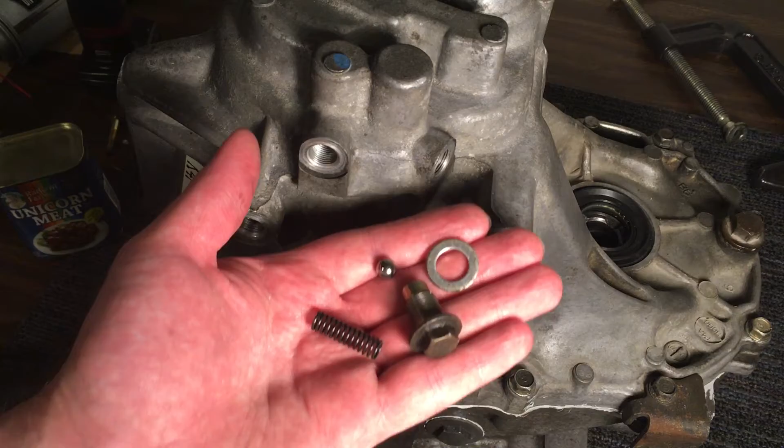Now we will install the set spring bolts. This includes the bolt, a sealing washer, the spring, and a ball bearing. Torque these down to 16 foot-pounds. Install the transmission hanger. Torque these to 20 foot-pounds.

Now it's time to run through the gears to make sure the transmission was put together correctly. Use a long shaft screwdriver to poke through the shifter shaft. To get into first gear, turn the shifter counterclockwise and pull out. Turn the main shaft. The shaft should turn easily. For second gear, turn the shifter counterclockwise and push in. The axle should turn a little faster.

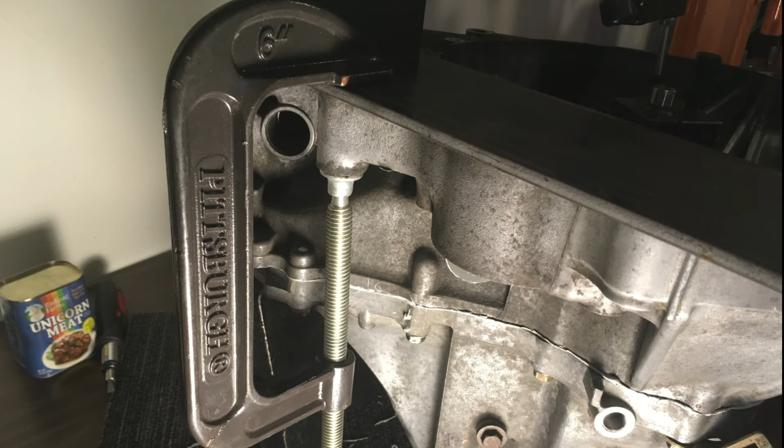We will now confirm the correct clearance for the main shaft. We will do this by using a dial indicator to measure the movement of the main shaft while tension is applied to it. Tension will be applied by the Honda Special Tool, part number 07GAJPG20110. First, clamp a steel base to the transmission housing. This will give the dial indicator base something magnetic to attach to.

Next, attach the Honda tool to the main shaft, and use something for the bolt to press against. We used a wrench. Zero out the dial indicator against the main shaft. Start turning the bolt until it stops moving. After the needle stops moving, do not turn more than 60 degrees, otherwise you risk causing damage to the transmission.

Honda calls for a clearance of 0.004 to 0.007 inches. This measurement was just below 0.007, so it is within spec. If it is not within spec, choose a different main shaft thrust shim and install it into the transmission.

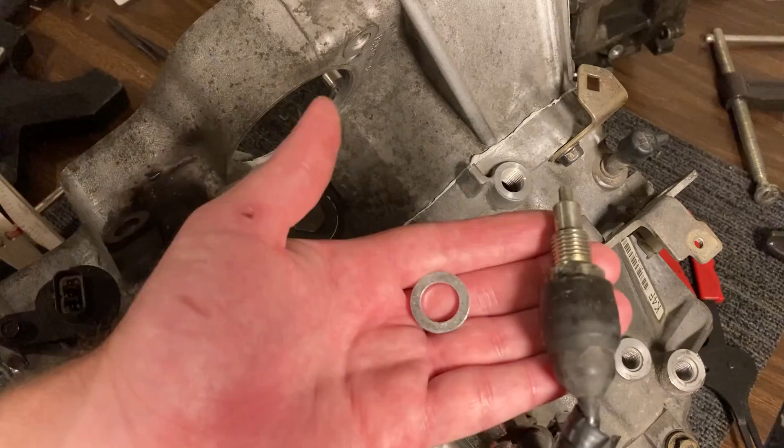Install the vehicle speed sensor. Insert the sensor into the hole, then tighten down the bolt. Install the backup light switch with a new washer. Screw the switch into its hole, then tighten down to 18 foot-pounds.

This guide showed the complete teardown and rebuild of this Honda Civic S40 B000 transmission. Parts of this teardown you may not need. If only one part of the transmission is bad, only use the parts that you do need. Remember, if you have the A000 stamped transmission, slightly different bearings will come in your kit. Refer to your Honda factory service manual to ensure the proper steps for your transmission are followed.